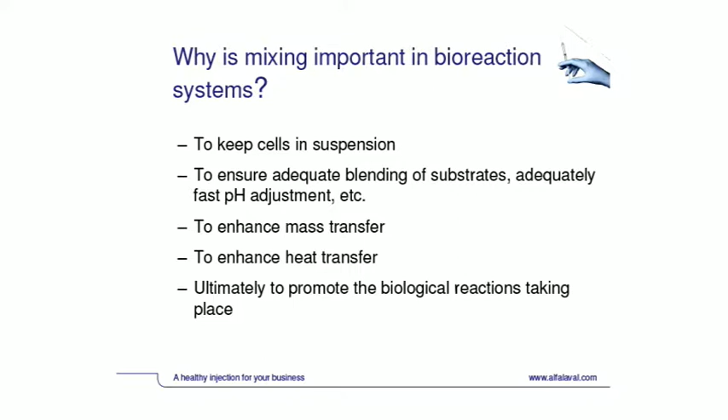So the reason why mixing is important in bioreaction systems is basically to ensure that we keep the cells in suspension. That, of course, we need to do. Then it's to ensure that we have adequate blending of substrates that we are introducing during the process, adequately fast pH adjustment, etc. If we're introducing gases, we utilize the mixing equipment to enhance the mass transfer. If we need to do heat transfer, then the mixing will aid convection and thereby heat transfer. And ultimately, we basically do this to promote the biological reactions taking place.

So if we just look at the economic impact of poor mixing in general, it was estimated around 20 years ago that the impact of poor mixing on industrial applications in the US, across all industries, was around 1 to 10 billion US dollars per year. And of course also, if you don't have optimal yield, then you need to do more downstream processing.

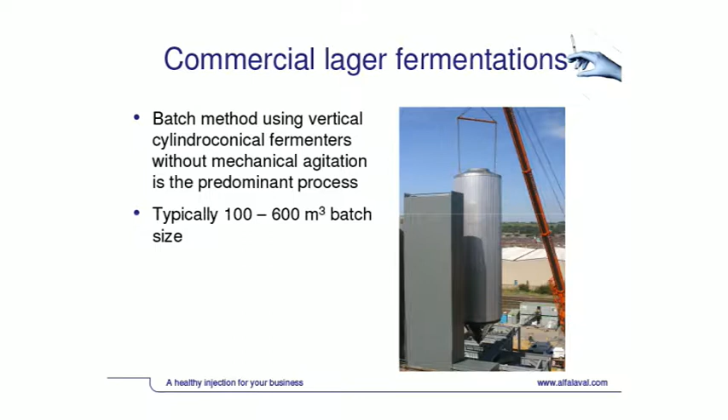But let me start out by giving you one example of what poor mixing can lead to. This is an example of inadequate cell dispersion, and it's taken from the brewing industry. So we're considering mixing in beer fermentation here, probably the oldest biotechnological reaction that you can think about. If you look at how lager is manufactured commercially today, it's done in batch reactors using vertical cylindroconical fermenters without any mechanical agitation in them. And we're talking tanks that are maybe 100 to 600 cubic meter scale.

Typically you're using what's called high gravity worts, so worts that have a very high sugar content, and the typical fermentation temperature is maybe 12 to 20 centigrades. You apply cooling by having external jackets on the tank. And the underlying assumption here is that convection currents due to temperature differences between the cooling jackets and the beer, and the effect of rising CO2 bubbles that you get when the yeast converts sugar into ethanol and CO2, will ensure good mixing. So you don't need an external agitator. That's been the general thinking.

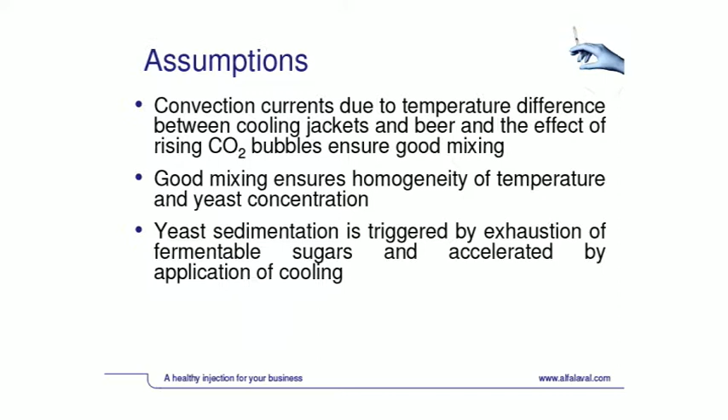And it's been assumed that good mixing ensures homogeneity of temperature and the yeast concentration. And then the final assumption has been that when the sugar is exhausted, the yeast will sediment out to the bottom, and you can take out the yeast before you transfer the beer to the filter line, or to a storage tank and then to a filter line.

So some years ago, a guy called Chris Boulton from the brewing company Coors actually looked into how yeast was distributed instead of just assuming that it was distributed in a certain way. And he presented that at two European Brewing Convention congresses. He used what's called an Aber instrument to measure the concentration of viable yeast cells.

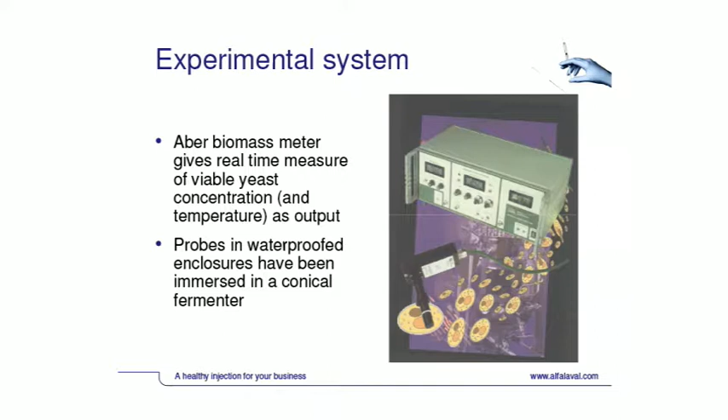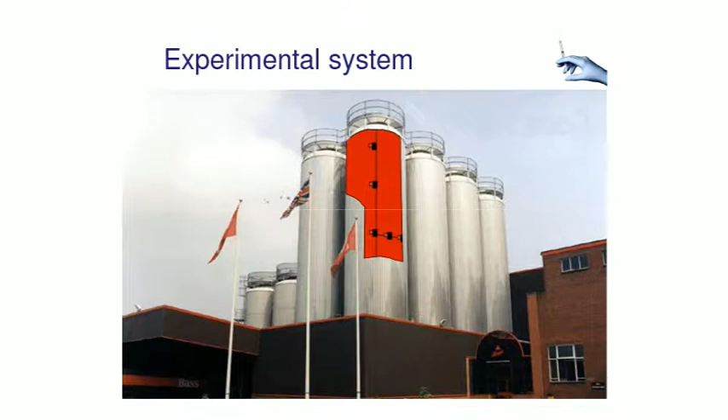He put these instruments into waterproofed enclosures and he immersed them into the tank. So here you see his experimental system. This was done in full scale. He put in a number of these. So you can see they're sitting here. And just to give you an idea, here they are mounting them on a wire. And they look like this.

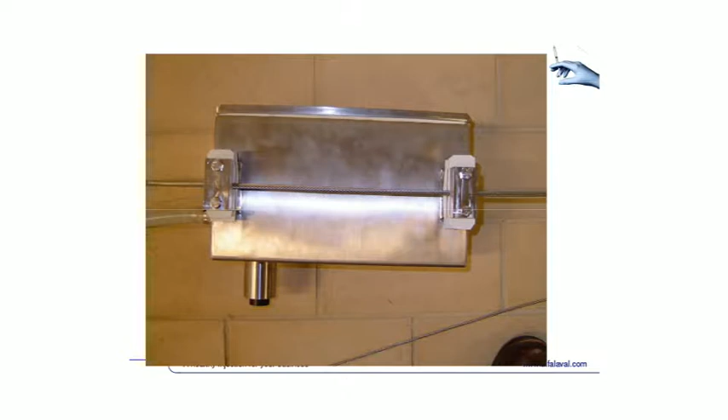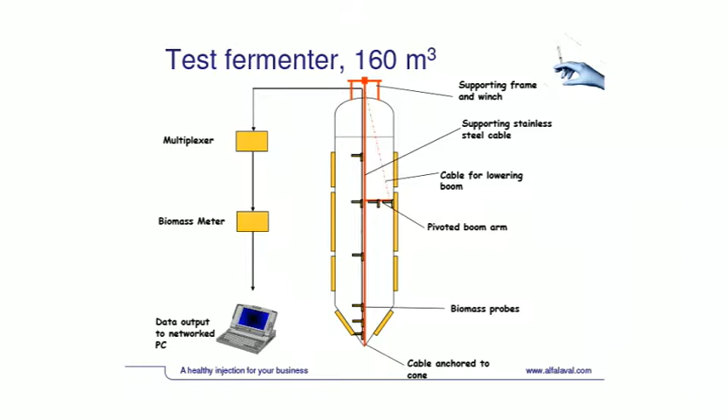This is the waterproof enclosure. Here you have the sensor. And then they put them in so that they were sitting here. So he can basically measure the yeast concentration at a lot of different positions in this tank. Here again, the probe location. The tank was a 1,636 hectoliter working volume tank. Brewers like to work in hectoliters, but it's basically 163.6 cubic meters.

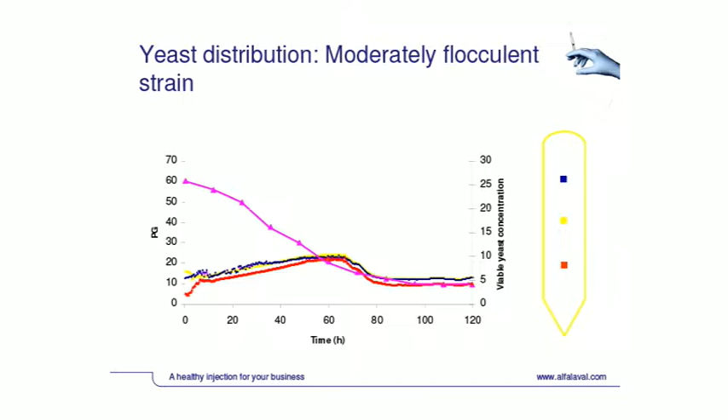So this one, or the yellow curve here, is for the next probe. The red one, we go further down, and now we get into the cone. Now you can see something happening. Initially in the fermentation, the yeast is actually not very well distributed. And that's because you haven't started formation of a lot of CO2 yet that will provide the mixing needed in this reaction. And then when approximately 60% of the sugar has been consumed, the yeast actually starts to settle out

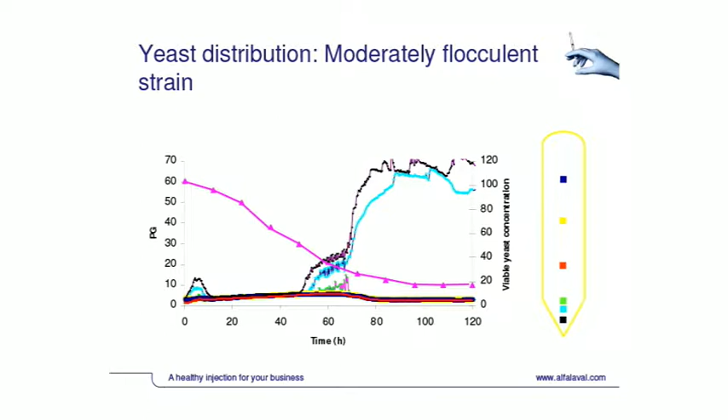in the cone. If you have all the yeast sitting as a compact mass down in the cone, it's not going to do you a lot of good, because you'll have all kinds of mass transfer issues into that sediment to actually convert the sugar into alcohol. So one way of getting around this would of course be to install some kind of mechanical mixing system. You can use agitators for that, but they've been used very little in the brewing industry, because they are not considered, at least by brewers, as very sanitary.

Instead, a system called the Isomix system is currently being installed in a number of major brewing groups. This system is based on mixing by rotary jet mixers that are modified Alfa Laval rotary jet heads that maybe most of you know from CIP. The principle is that you take the fermenting beer, recirculate it via an external pump, and re-inject it into the bulk liquid via one of these rotary jet mixers. You can add different things in the loop if you want to. They don't do that in the brewing industry.

If you want to remove heat, you can do that in a plate heat exchanger that you introduce in the loop. And basically the mixer can be installed either from the top or the bottom. If you install it from the top, it can also be used for CIP, because that was the original purpose of the machine. So I just want to illustrate the function to you here.

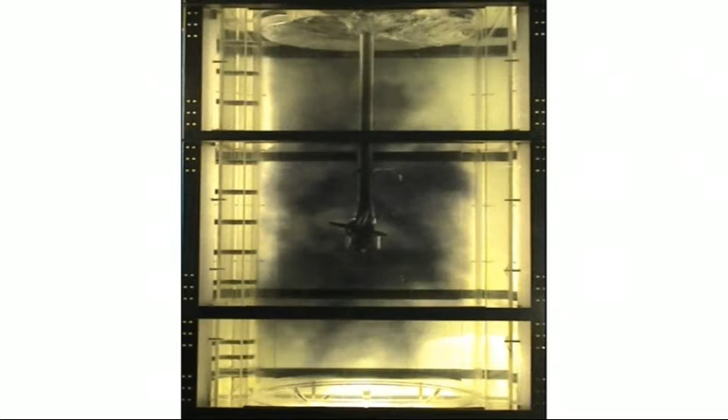So there the thiosulfate is injected and you can see how the liquid is decolorized. But you can also see how the head operates. It actually doesn't turn very fast. The mixing action is provided by liquid jets leaving these 4 nozzles at a pretty high velocity. That's what gives you the mixing. But because the jets are rotating, you're actually covering the entire vessel.

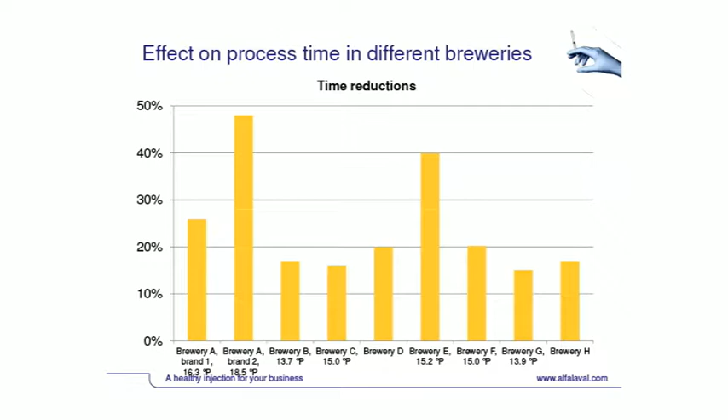What you see here is the effect that we've seen in different breweries after installing this system. This is the reduction in process time for different breweries, and you can see reductions in process time of anywhere from 15% up to more than 40% by installing this system. So we get a faster process just because we keep the cells in suspension instead of letting them sit at the bottom of the tank for an elevated period of time.

Okay, the next example that I want to show you is an example of inadequate liquid phase blending. And the model system that I'm going to discuss is enzymatic oxidation of lactobionic acid. It was a system that I worked with when I did my PhD. I thought I should be doing a lot of enzyme kinetics, and I did. But it ended up being more of a mixing study also, because we saw some really strange effects, or at least we couldn't explain them initially.

Anyway, lactobionic acid, just to give you some background, it's actually used in organ transplantation and calcium supplements, cosmetics. Right now, it has other applications. It could be used as a co-builder in detergents, as a corrosion protection. In food technology, it can be used as an acidulant, a filler in cheese production, and in functional drinks to supplement calcium.

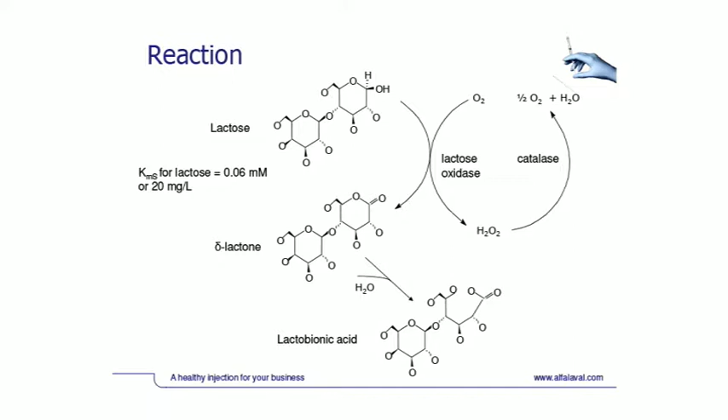The reaction of producing lactobionic acid from lactose is shown here. So you have an enzyme that you call a lactose oxidase, and it oxidizes lactose into a lactone that's broken down into lactobionic acid. A byproduct is hydrogen peroxide. So you need to add catalase, because otherwise the hydrogen peroxide will basically kill your enzyme activity. So you need to add the lactose oxidase, and you need to add catalase.

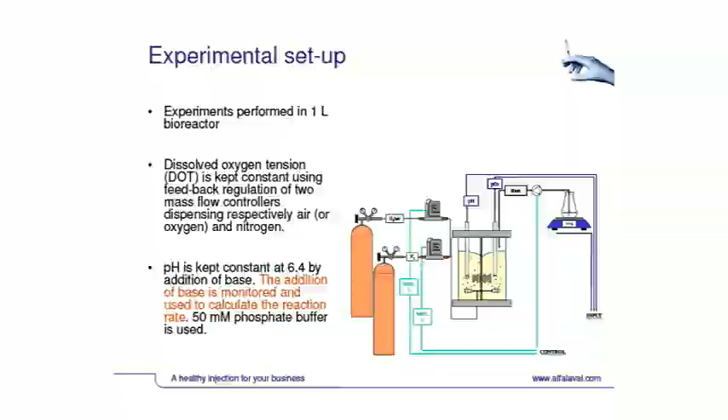So we started that in pretty small scale. All our experiments were done in a 1 liter bioreactor. We kept the dissolved oxygen tension constant using feedback regulation of 2 mass flow controllers that dispensed respectively air and nitrogen. So we kept the very same oxygen concentration throughout the reaction. pH was kept constant at 6.4 by addition of 2 molar sodium hydroxide base. But we had buffer in there.

So when you looked at the pH meter, every time pH dropped to 6.39, it would add a drop, it would go up to 6.40. You couldn't see any oscillations whatsoever on the pH meter. But what we saw when we started this reaction was that we had a declining rate in reaction. It declined very fast with time, the rate in reaction.

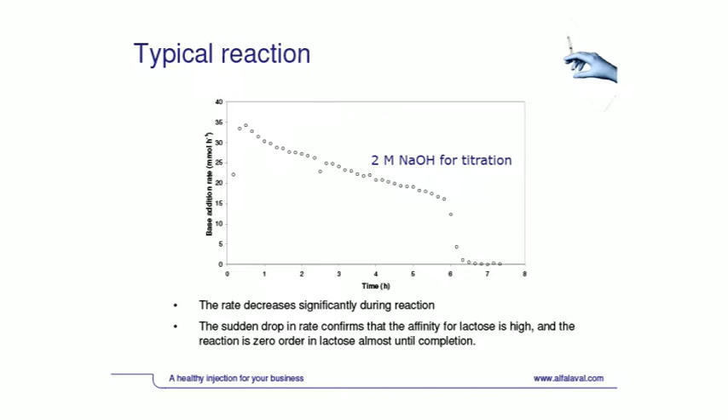And then we started looking at what happened when we increased the oxygen concentration. And we found out that the initial rate increased when we increased the oxygen concentration. But the rate of deactivation also went up quite a lot. So we speculated, could this basically be because when the rate goes up, we put in more alkali. If we don't have perfect mixing, that alkali can destroy the enzyme, so that gives us faster deactivation. And actually that turned out to be exactly the case.

So if we switch from 2 molar sodium hydroxide to a weak base, ammonia, that deactivation pattern just disappeared completely. And that basically proved that mixing was very important in this system. So the enzyme deactivated when we used 2 molar sodium hydroxide for neutralization. Even though we were doing this at really small scale, we're talking 1 liter reactor. We had 2 Rushton turbines in there that were revolving at 1000 RPM. I mean, it was mixing really, really fast.

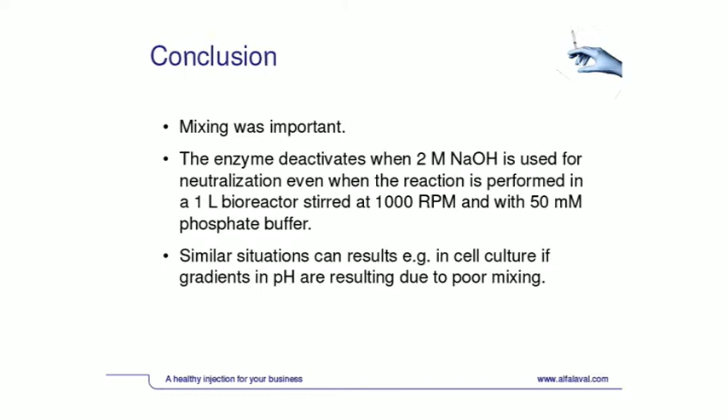Every time you put in a drop of sodium hydroxide, you couldn't see any change on the pH meter whatsoever. You didn't have any oscillations or something. So this was just because you had a very small zone with a higher local pH value for a very small amount of time. And that would be something that you could see in other biological systems also.

So if you, for instance, go to cell culture, you can have the same situation if you have gradients in pH due to poor mixing. Because often in cell culture, you don't have a very vigorous mix, right? You want a gentle mix. So you can actually, in some situations, get fluctuations in pH, which can lead to a lower yield.

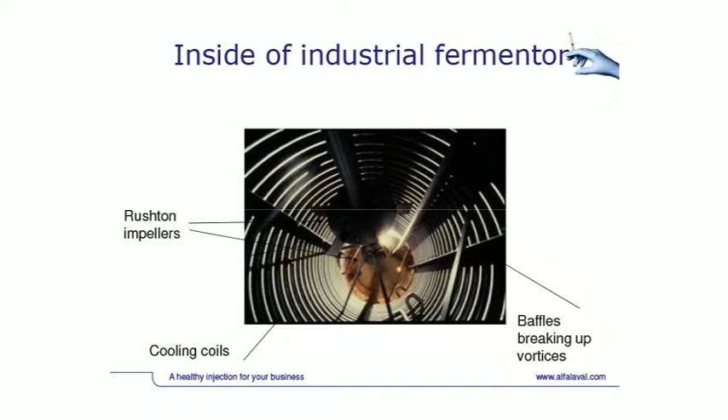So if we look at typical aerobic fermentations, then if we consider yeast as an example, yeast fermentation, where the purpose is to produce yeast or to produce a product that's captured in the yeast. That could, for instance, be insulin, if you look at the way Novo Nordisk makes insulin. Then you really want to keep the sugar concentration homogeneous, and you want to keep it low, because if you don't keep the sugar concentration low, the yeast will start to produce alcohol. And you don't want to make beer here, you want to make yeast.

You want to ensure a constant pH. You want to ensure sufficient oxygen transfer by adequate air dispersion. And when we are talking aerobic fermentation, you need a lot of oxygen transfer. So in a typical industrial scale bioreaction where you're maybe producing yeast, you might be producing some enzyme in filamentous fungi. It could be an E. coli fermentation. Typical aeration rates will be on the order of maybe 1 volume of gas per volume of fermentation volume per minute. So we're talking huge amounts of air that you need to introduce.

You need to be able to break that air up with the agitator. Otherwise, you're not going to get good mass transfer, and you're not going to get the process result that you're after. Also, if you have these very aerobic fermentations, they will generate a lot of heat. So you also need to make sure that you can actually remove that heat. So by having good mixing, if you have the coils in the tank, you will get better heat transfer, basically.

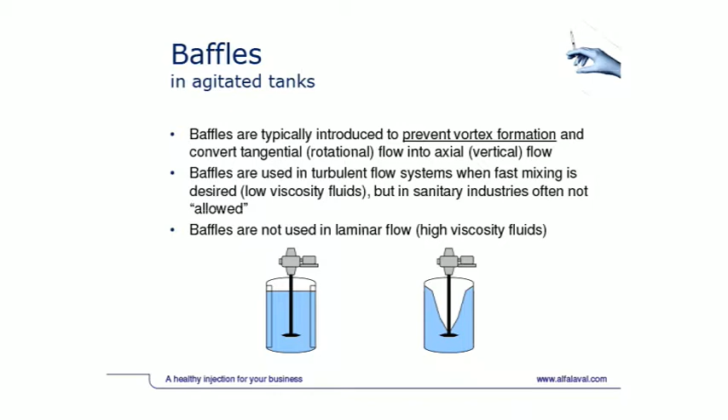We talked about baffles a little bit already, but the reason why you're actually introducing baffles is to prevent the vortex formation that would otherwise result. If you don't have the baffles and if you have the impeller placed centrically in the tank, what would happen is that the liquid will basically just go around like this. You'll get a vortex, but you won't get good mixing. I mean, it's just fluid elements traveling around, so you need the baffles to get really good mixing.

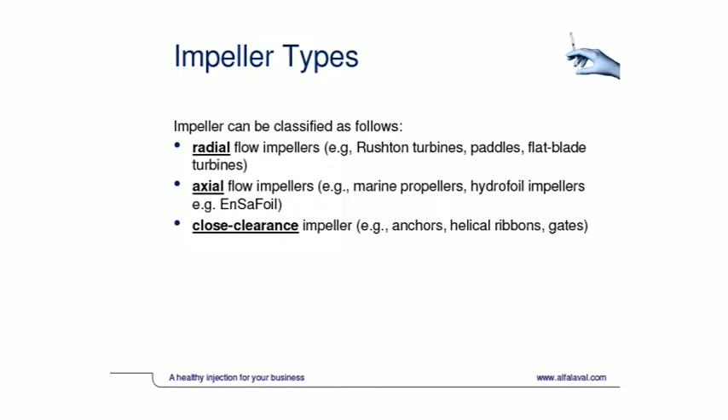Then if we look at the impeller types, you can use what's called radial flow impellers, you can use what's called axial flow impellers, and then you can use something called close clearance impellers. But these ones are impellers that are typically used for high viscous products, so we don't want to consider them here, because even in high viscous industrial fermentations, like an industrial fermentation of filamentous fungi, you won't use these ones. You'll use these kinds of impellers.

And just to give you an idea about what the difference is, radial flow impellers basically produce a radial flow. They're primarily used with low viscosity liquids in baffled tanks. And the disc turbines of them are normally used for gas dispersion. So here you see a number of different radial flow impellers. The Rushton turbine has been used quite a lot in industrial fermentation, but people tend to move from this type maybe over to this type now. I'll come back to why.

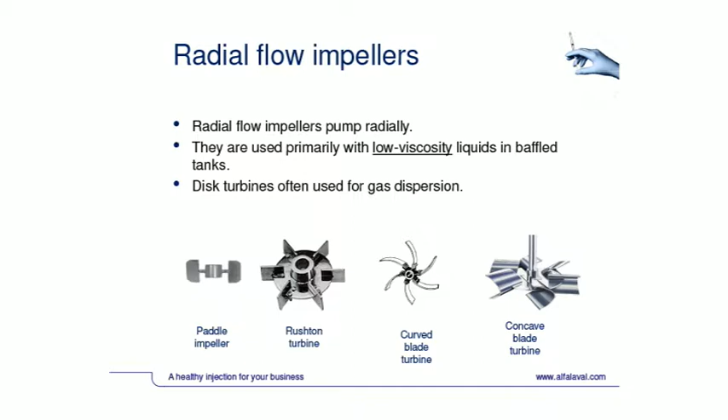The other type of impellers are called axial flow impellers. So they pump primarily, but not exclusively, vertically, either upwards or downwards, depending on basically whether you put the impeller like that, or whether you put it upside down and turn the shaft in the opposite direction. They're used mainly in low to medium viscosity liquids. Yeah.

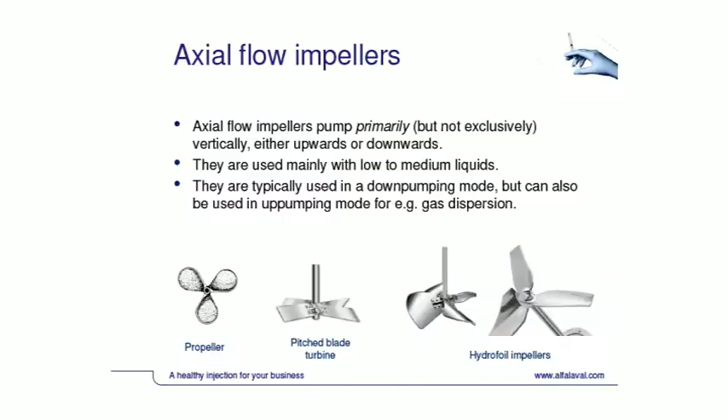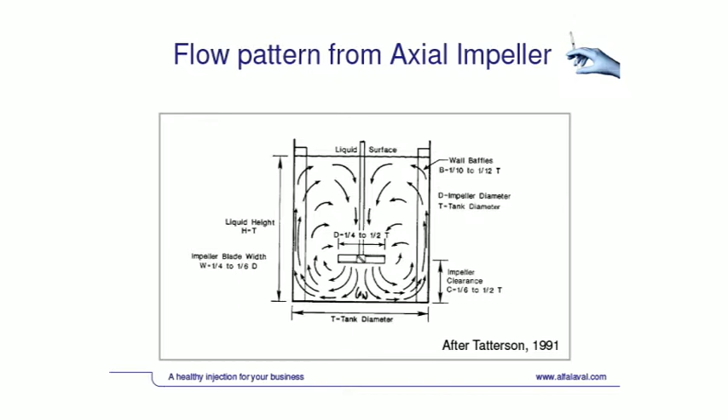When we consider impellers, there are basically two numbers that are very important. The first one is the Reynolds number. It says something about the ratio of inertial forces to viscous forces, and whether or not the flow is turbulent, transitional, or laminar. And you need to know that, because when you design an impeller, you'll have different functionalities for how long it takes to mix, whether or not the flow is actually turbulent or transitional.

Another very important number is called the power number. So it relates the power input to the stirrer speed and impeller diameter. And there are several reasons why it's important, but one of them is that if you have an impeller with a high power number, that means that you have a large torque. So it means that if you choose such an impeller, you also have to size your shaft and gearbox, etc., so it becomes more expensive.

And here are some power numbers for different impellers. So you can see that Rushton impeller we talked about before, it has a very high power number. So that means that if you take a Rushton turbine, it will revolve at pretty slow speed, but it will draw a large torque.

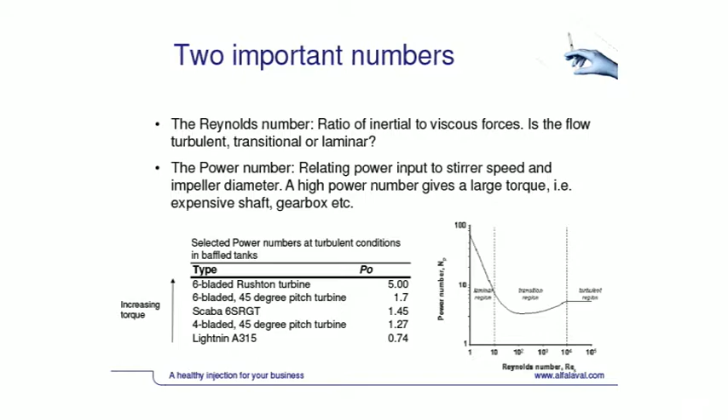So if we look at our agitators in Alfa Laval, our agitators are primarily hydrofoil impellers, or based on hydrofoil impellers. They're very good at pumping. So if you compare something called a pumping number, which basically says something about how good the impeller is at pumping or making flow, compared to the power number, which is about how much power it is consuming, it has a very high ratio of 2.6, and common for other types is maybe 0.6.

So this basically means that with such an impeller like this one, you can make a lot of pumping at low energy consumption compared to other impellers of the same diameter operated at the same rotational speed. So if you have a process where you need a lot of flow, you should go for this kind of agitator.

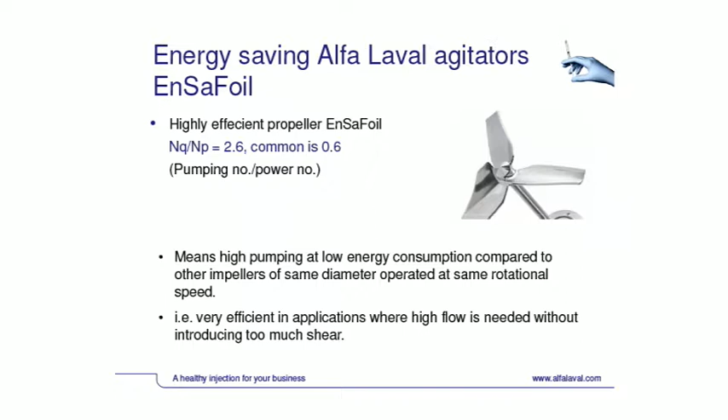If we look at mixing time, then mixing time can be important, as we already discussed, because, for instance, if you are blending in substrate in a reaction where you need to have a sufficiently low substrate concentration all the time, because otherwise your organism might start producing ethanol if we are talking yeast. It might start producing acetate if we are talking E. coli. Or if we are having enzyme production in filamentous fungi, they'll just shut down the enzyme production if you don't have that low substrate concentration all the time.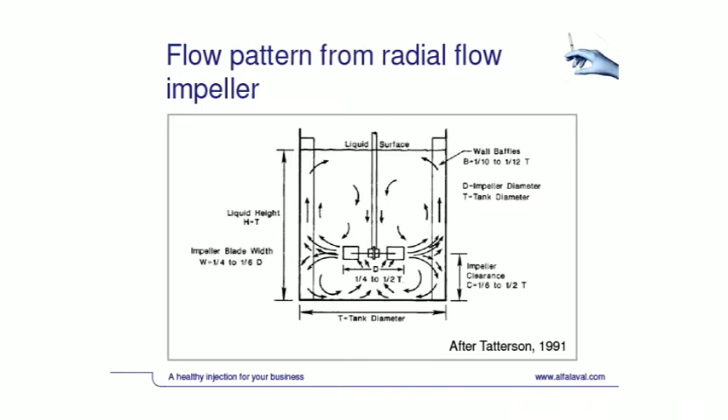If you take those axial flow impellers instead and have multiple of those stacked on top of one another, zoning is much less severe. So if you have tall tanks with more than one impeller and mixing time is of importance, then mixing time will be lower if you use axial flow impellers like for instance, our EnSaFoil impeller rather than radial flow impellers.

So if you remember that bioreactor I showed you in the very beginning, it had 2 Rushton turbines on top of one another. It's not going to give you very good liquid mixing. It's actually pretty slow in making an even concentration in whatever substrate you put in on the top. If you want faster mixing, you need to go in and retrofit that agitator.

Then if we look at gas dispersion, which is very important also in aerobic industrial fermentation, then there are some concepts there also. So the first concept is the transition from what is called flooded to loaded. So flooded is a situation where either you're providing too much gas that the impeller can handle, or you're operating the impeller too slow so it can't handle the gas.

So it's a situation where the bubbles pretty much just rise up. They're not well distributed in the tank. This is loaded. That's a situation where now they're actually well distributed, at least above the impeller, and here they're completely dispersed in the entire volume.

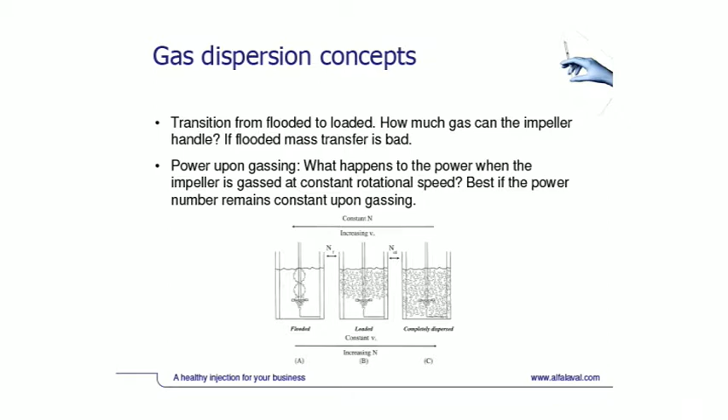So studying this transition from flooded to loaded is important because it tells you how much gas the impeller can handle before it kind of runs out of speed. Because if you get to a situation like this, then mass transfer is going to be really bad. So you're just putting in a lot of air that's not going to do you any good.

Another important concept is what happens with the power on the motor when you start gassing. Because some impellers will actually take up less power. So that means that unless you're running the motor on a variable frequency drive, you're not actually getting all the power out of that impeller that you want to get out of the impeller. So it's best if the power number remains constant when you start actually adding gas.

So if we look at gas dispersion, then radial flow impellers have traditionally been used. And that's also the reason why you saw those kind of impellers in that industrial bioreactor I showed you before. They're very good at dispersing gas. The Rushton was the preferred choice. But it has the disadvantage that if you operate it at a constant speed and start adding gas to it, the power actually decreases upon gassing.

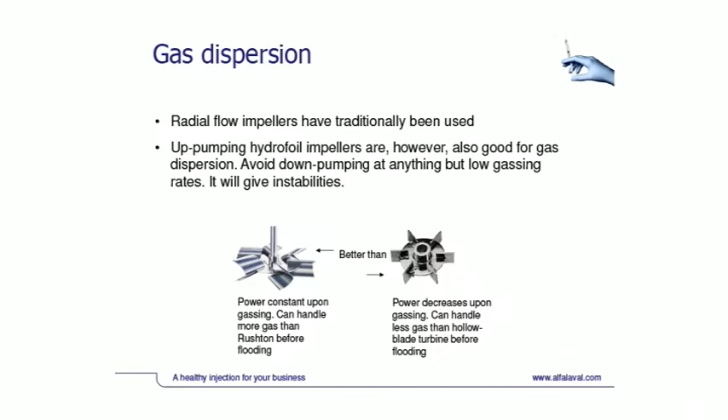If you take one like this, power doesn't decrease when you start adding gas. It just stays constant. So that means that you can do basically the sizing once and for all, and you know how much power it's going to draw. And then it can actually handle much more gas also before it floods, that situation where the gas wasn't very well distributed. So I would definitely choose an impeller like this for any gas dispersion task rather than an impeller like this.

You can, however, also use axial flow impellers, but you need to operate them in a mode so they're pumping upwards. If you try to take an axial flow impeller and start gassing it and it's pumping downwards, then, I mean, you all know gas wants to go upwards. The impeller wants to pump downwards. So what's going to happen is that you're going to get a lot of instabilities. You're going to get a lot of torque fluctuations on the shaft and the gearbox. So from a mechanical point of view, it's just not good.

And I've heard stories about, I think it was Merck that did some trials where they wanted to test a downpumping axial flow impeller in their pilot plant. And the torque fluctuations were so big that the fermenter actually pulled itself out of its grounding and kind of started dancing through the room. So you don't want to take an axial flow impeller and make it pump downwards.

So just some recommendations on what impellers you should actually choose then. First of all, if we are talking mixing in those small bulky tanks that have a height equal to the diameter and we don't consider gas dispersion, then choose a low power number impeller, like for instance the EnSaFoil impeller. If we are talking mixing in tall tanks but without gas dispersion, then choose axial flow impellers because they don't give you this zoning. You can choose either up pumpers or down pumpers, it doesn't really matter.

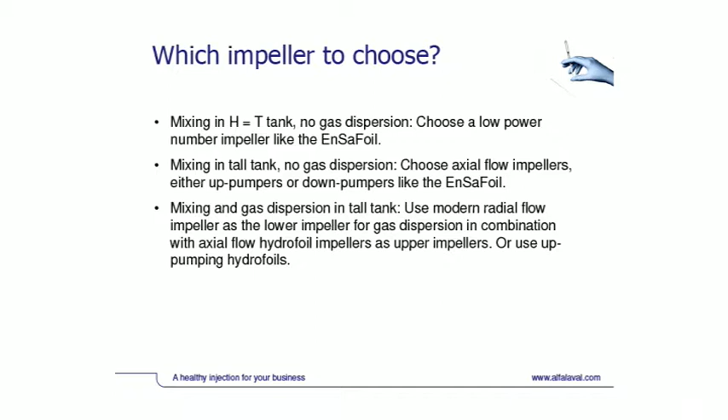If we're talking applications where both mixing and gas dispersion are of importance in tall tanks, like for instance in industrial fermentation, then you should probably use a modern radial flow impeller as the lower impeller for gas dispersion, and then some axial flow impellers as the upper impellers to provide good liquid mixing.

Okay, now I just want to talk a little bit about cell culture. And the reason why I didn't talk about cell culture before now was that I wanted to introduce those concepts for agitators before getting to cell culture. So cell culture, or animal and insect cell culture, is basically used in the production of highly valuable biologicals such as vaccines, hormones, growth factors, and monoclonal antibodies. The cells lack a cell wall.

If you compare it to, for instance, aerobic fermentation, the oxygen transfer requirement is very low compared to aerobic fermentation of, say, bacteria, yeast, or filamentous fungi. So you don't need to transfer that much air. However, the dissolved CO2 concentration has to be controlled because too high values will lead to toxicity to the cells.

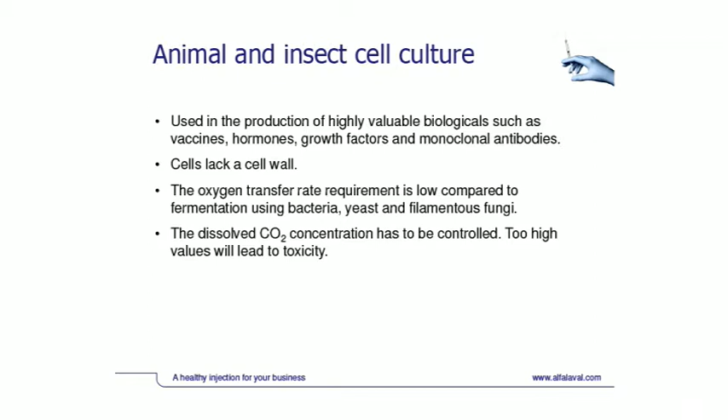So, if you study cell culture a bit, you will find out that people are very worried about shear stress because of that lack of cell wall. So these are systems that were at least originally thought to be very shear sensitive. And that has led to a situation where people in general employ very gentle agitation.

However, nowadays it's been realized that the bubble liquid cell regions are probably actually more important. And then if you take a system where you don't introduce gas into the system and agitate, you can actually agitate them at fairly high power inputs without destroying the cells.

But this bubble liquid cell interface, that's very important. And you can basically break that up into 4 parts. You'll have bubble formations at a sparger. Then the bubbles, they can coalesce. They can also break up in the vicinity of the impeller. They will rise up the liquid. And at the very end, they will burst at the surface.

And it's actually that bubble bursting which is a major issue. Because if you look at how much energy is released when a bubble bursts, it might sound totally counterintuitive. But nonetheless, bubble bursting at the surface releases a very high local energy level. It's only local, of 0.5 kilowatt per milliliter. So if you have a cell that rises up in that bubble liquid interface and it reaches the surface, then that cell will be exposed to that high energy level, and it can't handle that.

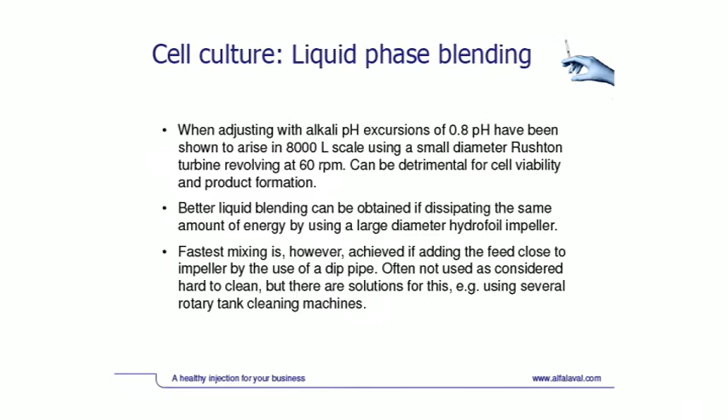The fastest mixing, however, and therefore the least excursions in pH, you'll get if you add the feeding point very close to the impeller region by installing a dip pipe. It's often not used because it's considered hard to clean, but you can clean it if you just put in 2 tank cleaning machines so that you don't have a shadow that they can't handle. So it's not impossible, and it does give you very fast mixing so that you don't get these pH excursions.

If we look at the CO2 toxicity, then as I already said, we need to control the dissolved CO2 concentration, because CO2 in too high concentration can be toxic to the cells. The CO2 concentration that's dissolved will depend on the partial pressure of CO2 you have in the gas bubbles. So therefore it's important to have a certain gas flow rate so that you have a sufficiently small partial pressure of CO2 in those gas bubbles.

So one strategy that's probably not really applied that much in practice could be to introduce two spargers. One that produced fairly big bubbles so that they could help you drive out the CO2, and another one that produced small bubbles that actually gave you the transfer of oxygen into the medium that you need.